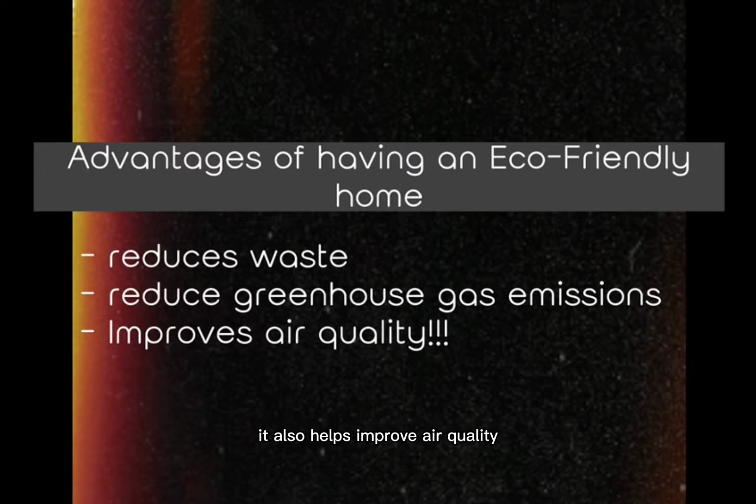In terms of its effects on the environment, the advantages become much clearer. It not only reduces waste but also reduces greenhouse gas emissions. It also helps improve air quality, which can help people who are sensitive or have respiratory diseases such as asthma.

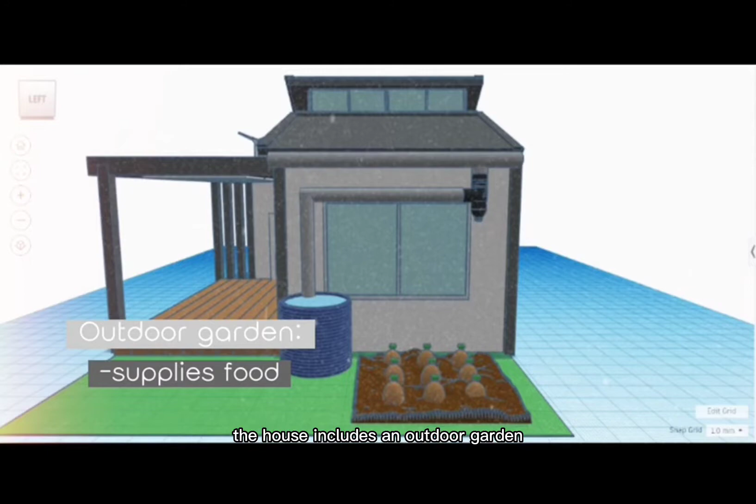The design of our eco-house is sustainable in terms of energy and farming. The house includes an outdoor garden to maintain a production and supply of food without the owner having to worry about the usage of pesticides.

The house applies an open lighting concept with many large windows around the design, as well as skylights to allow daylighting to be utilized to the maximum and control the admission of natural light.

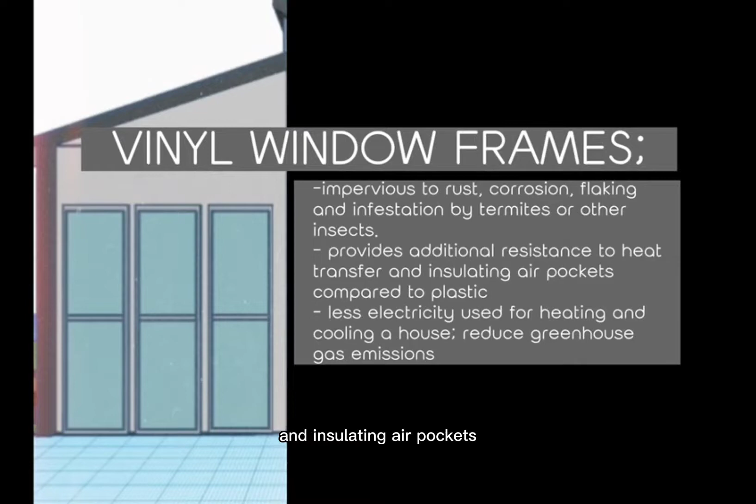Vinyl window frames are used as they are resistant to rust, corrosion, flaking, and infestation of termites or other insects. It also provides additional resistance to heat transfer and insulating air pockets compared to plastic. Less electricity is used to heat and cool the house and reduces greenhouse gas emissions.

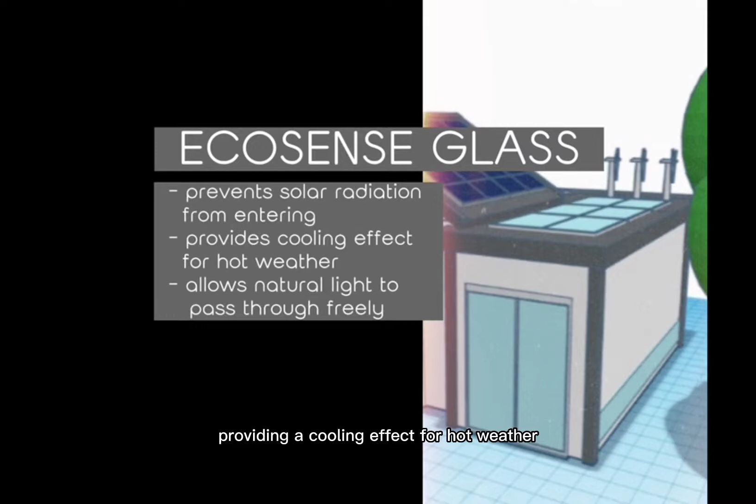We also make use of EcoSense glass when making windows and skylights. EcoSense glass prevents solar radiation from entering, providing a cooling effect for hot weather, and also allows natural light to pass through freely. We use white paint as it attracts natural light, which subsequently increases the brightness of the house

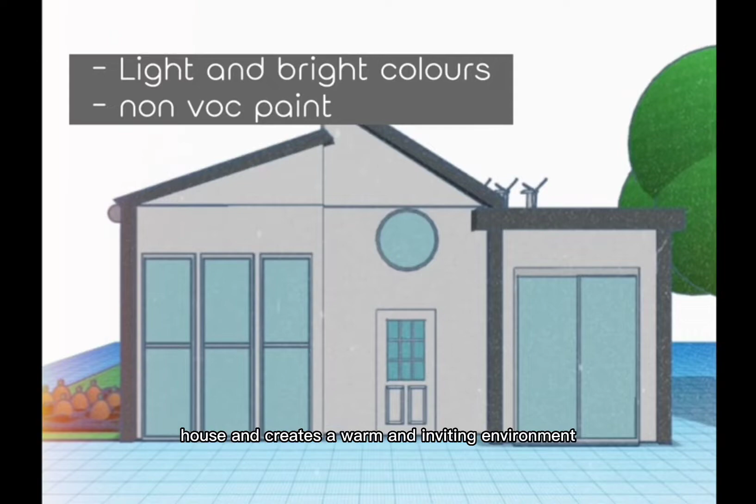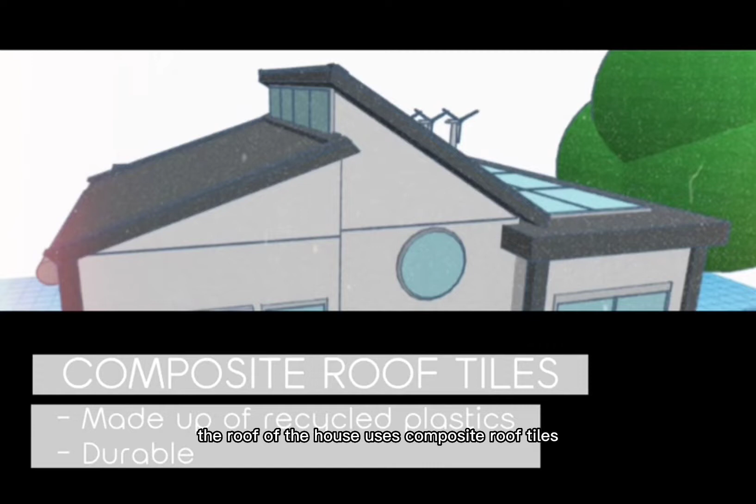The roof of the house uses composite roof tiles, which are made up of recycled plastics that are molded to mimic their natural counterparts. Composite tiles are made with colors that permeate the tiles and will not fade and weather poorly. It can be worked on for maintenance without the fear of damage.

A pipe is installed on the left side of the roof. Rainwater will fall down the angled roof and be collected. The water will then be sent down the pipe into a filter system that can be easily removed to be cleaned. After being filtered, it is put into a large container on the outside of the house.

A hose can be connected to a tap on the basin to help water the garden. The water is also connected to the inside of the house into the kitchen so that the water may be boiled before being consumed. The house runs on two different modes of electricity.

The first is by converting sunlight into solar energy with solar panels on top of the house, and the second is by using wind to generate electricity by turning the wind turbines also located on the top of the roof. This is to ensure that there is always a constant supply of energy in case of changes in weather or lack thereof. A solar battery bank is also kept so that the energy can still be supplied without sunlight.

During the day, extra power can be generated by solar panels. The extra energy can be stored in the solar battery bank to be used at another time. Multiple wind turbines are situated on the roof to ensure a sufficient output of energy.

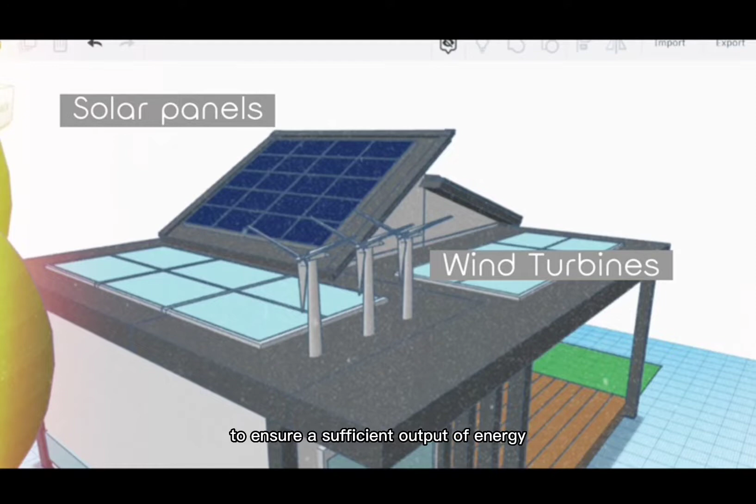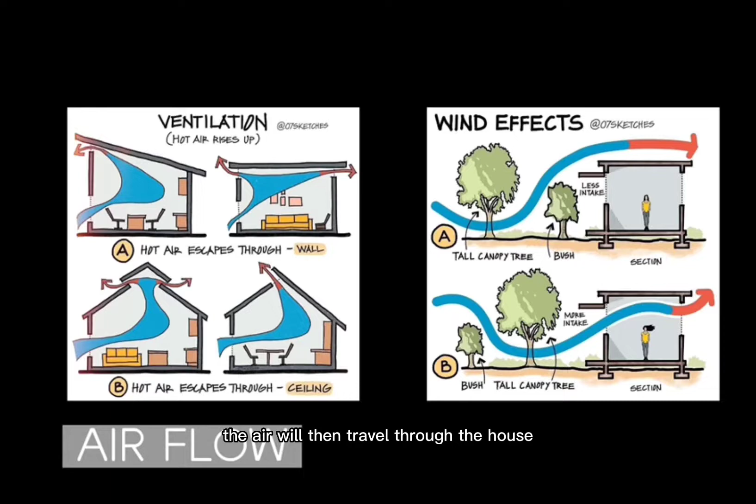The air will then travel through the house and exit through the ventilation or the skylights located on the roof. This allows for a constant flow of circulation to occur within the house and keep the house cool.